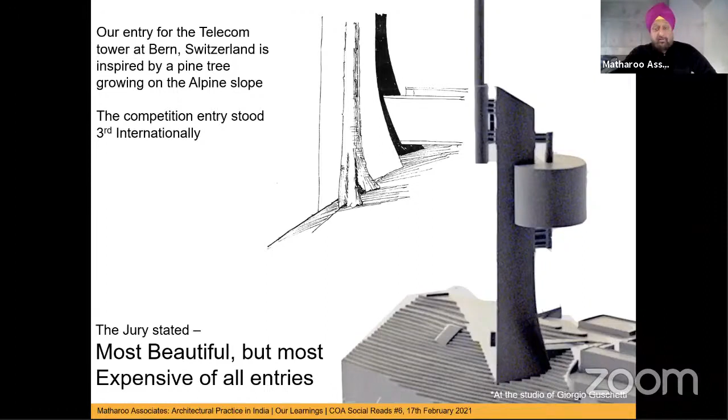So the first lesson that was learned: have to be frugal, or even the Swiss won't buy. At that time, Switzerland was the most expensive country compared to India, maybe 14 times or so. So we took this as a given that in our practice we have to be extremely frugal. We are back in India, working in India, let's be frugal.

Within that same context, I'll take the first project, a government hospital that got completed about 5 years back. This is the ESIC hospital. ESIC is the Employees' State Insurance Corporation, meant for the poorest of the poor people, the laborers, etc. When this job came upon us, this was actually a Kanvinde building earlier, which got badly damaged in the earthquake, and it had to be brought down and rebuilt.

So we were happy to be working in the shadows of Kanvinde. Here, what we did was say, let's make a very robust building, which will not call for a lot of maintenance, etc.

There were lots of funds available for making the OPD and having the entire building air conditioned. We went against it and said, let's try and use the funds elsewhere. So you have an OPD, which is a very simple OPD, it costs 5 rupees an entry, and you have a night ward, which is 100 rupees.

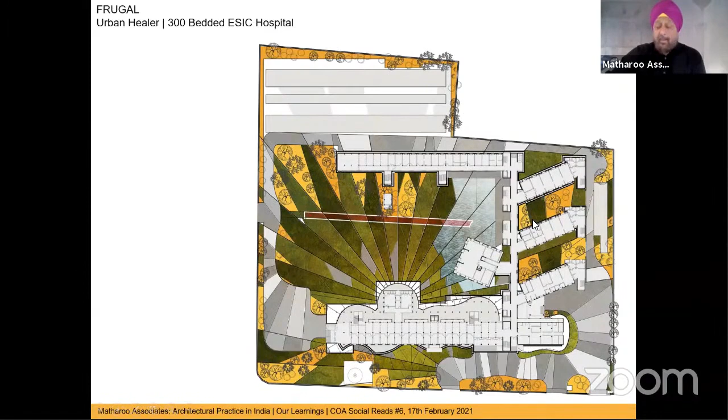Another view—all the wards look out into the garden, as you can see. A robust building, very simple construction.

Also, everywhere we're trying to save the cost. So you see an example here that this entire stretcher movement, about 6 floors high, we had ramps. So to save costs, we have used the shuttering in an inclined manner. The shuttering is inclined to the slope of the ramp, so you are not having any wastages. The entire wall is cast inclined. So measures like this, which save costs here and there, is what has been employed here.

We come to the second philosophy, one of the essence that we have filtered down, which is saying that every time there's a debate in the office, we choose something that is lesser in volume, lesser in mass, lesser in cost. So the general philosophy is, when in doubt, you reduce. When you don't have a clear position in mind, you try to take the one which is on the reductionist path. And when you are very clear what you have to do, surely reduce. Either way, you go for the reductionist methodology.

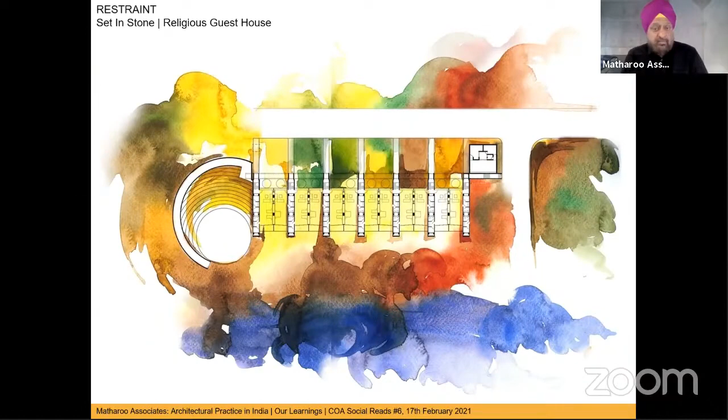So this is the plan that we have, basically those thick walls you see. They hold all the services, and you have voids in between which open out onto the two sides, completely open on two sides. Even the passage that connects all the rooms, which would become a hindrance on one side, we have lifted it up and made it like a mezzanine passage. So you either go down or go up to the first floor, or down to the ground floor, and it's a passage hanging in between.

Now that's the section that you see, the passage hanging in the middle. At the lower floor, one opens out onto the green, with the water body on one side. And on the upper floor, again the same thing, over the roof, opening out onto the same side.

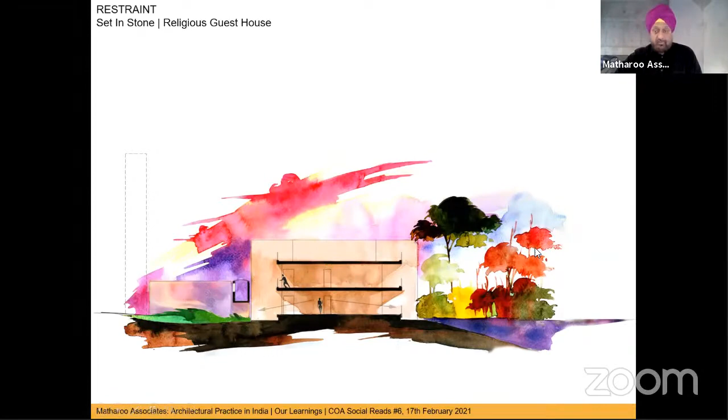Normally when you are trying for something, you are mostly not succeeding. That's the norm, we make it like a norm. However, whenever we succeed, it becomes an exception. A dear friend of mine, Rajesh, interpreted our surname, Matharoo, as 'Matharoo, never lose.' This was an awakening moment for our family, because they never meant it to be like that. Thanks to him, we take that as a philosophy for our works.

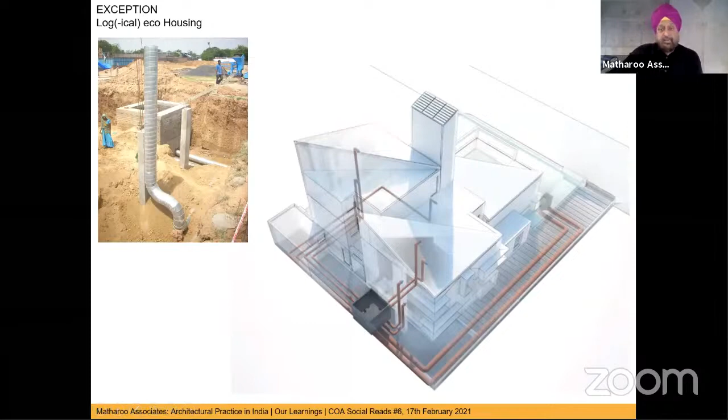We come to the fourth chapter now, which is to bring in light. Light has become especially important because we live in a tropical area. Our harsh sun is probably a boon, and also it's the biggest problem. So both ways we deal with it.

And there was another project we dealt with. So we say that with light you bring in delight - let the light fall on the surfaces and create delight. What happens with this light, with natural light, is that the space is changing throughout the day and throughout the season, and that's the most beautiful part of any space that we create.

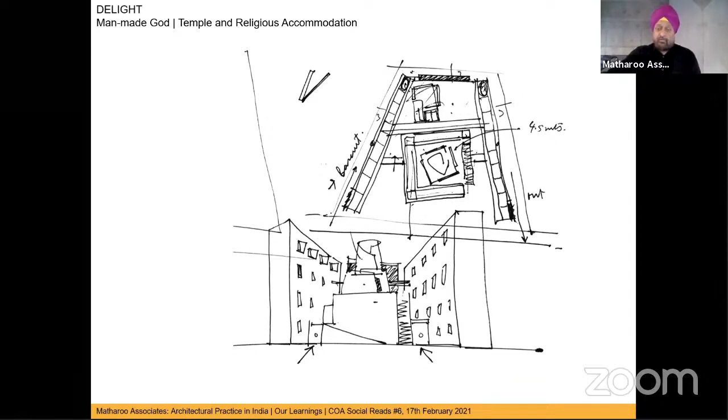Here was an invite to do a small temple and an ashram, a very small site in the city of Ajmer, and what we did was to cut it off from the surroundings. We made the ashram all around the temple. This was a sect which was open to interpretation - they didn't want a traditional temple at the start, and we could explore some possibilities. So that's the temple surrounded by the ashram all around.

And the roof actually comes out like a water spout, which carries all the rainwater falling in one large water spout at the end. That's the view, the mysterious one - once you come inside, that's the entrance to the temple. Starting from a cube, it dissolves and becomes an open-ended structure at the top. So that's the whole idea - the entire form is made like a small cube which, as it goes up, becomes an open-ended structure.

These are the windows of the ashram, which are facing the temple side, so you have a view of the temple from all three sides. On the other side, which is a passage, it becomes the view to the city all around - that is Ajmer, a desert city. So you have stone jalis which are framing the city on the other side.

And in this we were able to get the sanctum devoid of all the murals and the scriptures, etc. It is bare and solid. You can see the center of it is a shivling, which was designed by us with the Nandi and the entire paraphernalia happening in the center. And that's the water spout, which is the culmination of the curved roof - very raw, very basic, with a lot of play of the sunlight on the walls.

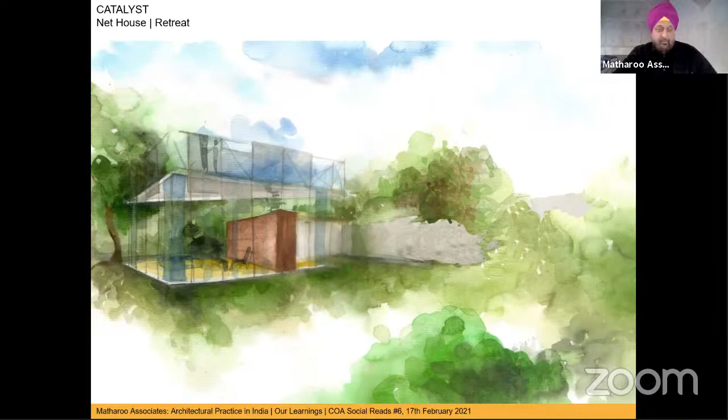Then we had a problem of how to actually make it happen. Anyway, we struggled with our team, and finally the place opened. It was like a suspended slab without any columns or structure holding it up. It is all held from top, on thin mullions - thin steel columns everywhere - with a layer of lead net all around. So finally we could make a house which is completely covered in net. It was insect free, right in the middle of Ahmedabad, and completely open to nature on all sides.

The only connection from the terrace to the ground is this water pipe, which brings in all the rainwater, takes it up, and it falls from here, making a spectacle before going into the ground. But it is not lost into the ground.

What we did was we created a huge rainwater tank, which holds 14 lakh liters of rainwater underneath this. So you see this structure, which is small, and you have a huge tank underneath it, which is 14 lakh liters. In the extension we are doing now, which is almost complete, they have increased this volume to 28 lakh liters, because they said that 14 lakh liters is good enough for 6 months, but they would like to have rainwater for the entire 12 months. So that capacity has been increased, and now it is 28 lakh liters.

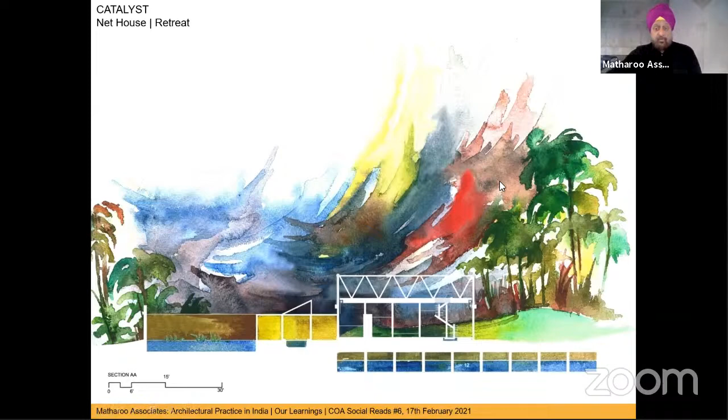Anyway, going back to the project - we have this structure held from top, this space frame with thin mullions. You have blackout screens with chicks, you have net screens as another layer, then the glass layer for air conditioning, and finally one cabinet which is basically the entire storage. You have the kitchen, the TV, the dining table, and at the back of it the toilets and all the fitments - this one cabinet. Once you lock it, it becomes the entire house, and then everything else is free. The top of the cabinet becomes a light source, throwing light on the ceiling so as to not attract too many insects.

So that's the house that we see here, embedded in mounds etc., so that you don't have any connection with the outside, which is our default Ahmedabad urban scape.

Next chapter - our interpretation of green. We say look at it with an open mind and add some blue to it. It's a turquoise approach, which is basically saying it's a scientific approach to looking at green. It is not the cliched idea where you see earth and say it is green - it's not that kind of approach. It is basically saying you have something which is scientifically tested, you've re-questioned, found answers, and then you're applying it.

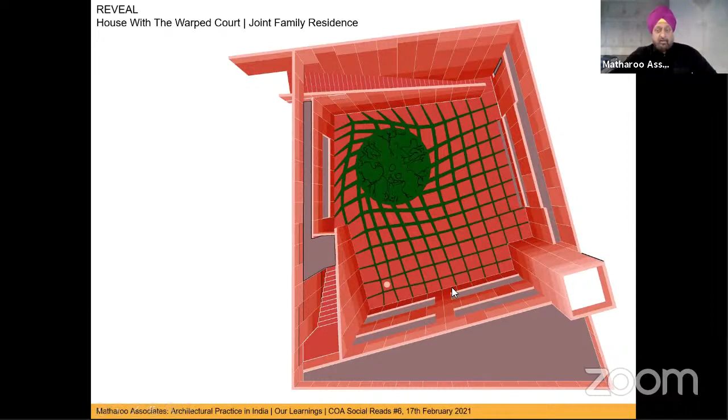You see all the high rises around, and even on this side it's a busy road. What we did was completely cut it off from the surroundings—we made a cocoon inside. So there are blank walls mostly, and a courtyard right in the center of the house in red sandstone, marked by a ramp, a staircase on one corner, and a lift on the other. All circulation elements are around this, and it becomes a completely interior courtyard. Once inside, you're completely cut off from the high rises around—nobody can look into it, and it's absolutely peaceful, where you can even hear birds in this dense environment.

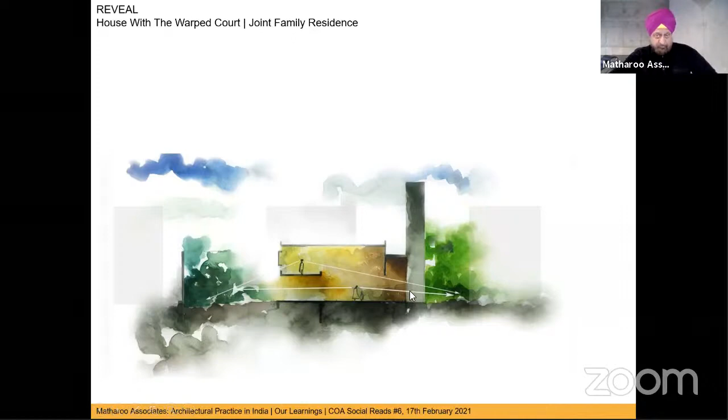If you look at the section here, that's the court, and you have the mezzanine. The building is of course closed from the outside, but it's completely open on the inside. Once you're inside this living space, it connects the court to the outside very smoothly. That's the entrance passage, which blocks off the outside, however opening at the lower level to nature and bringing in light from the top. That's the courtyard wall. This is at the lower level, it is completely open. You can see the court in the middle, and that's the outside veranda. So there is absolutely nothing coming in the way, it is open through and through. Also, if you look at the library on top, it has a window which is looking out into the green on this side.

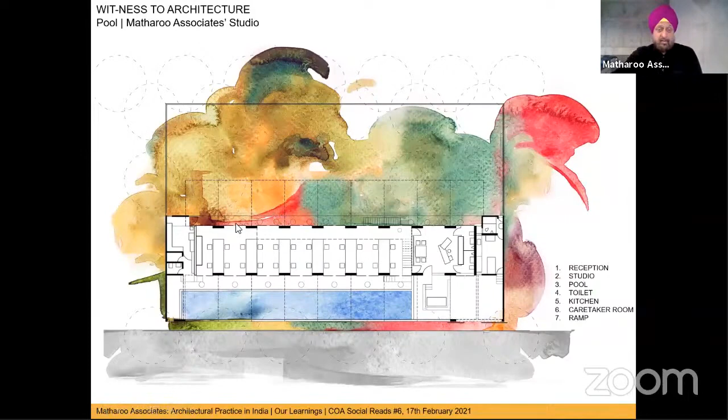And the section. So basically, we have the studio here, we have the garages here, and we have a cover which goes all over and covers the entire building. It's a very simple building, but the cover makes it that much bigger with the pool etc. inside. This cover acts like insulation, like waterproofing, and that's our waterproofing.

Basically, this roof acts as the insulating roof to the entire structure. And additionally, it gives us this place which is used for workshops, which is used for model making, which is used for students when there are lots of them.